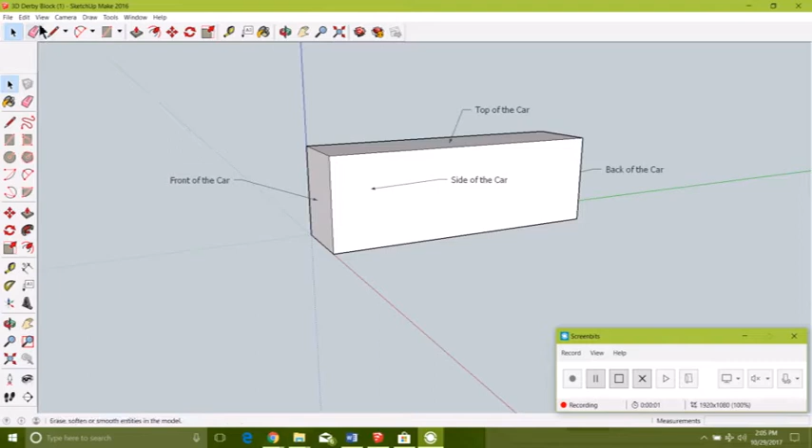The first thing you're going to do when you open the file is use the orbit tool and get to know this block very well. Notice the front, the side, the top, and the back of the car. Make sure you know where all these parts are so you don't mess up later.

Now use the orbit tool and turn all the way around, and notice that the other side is completely hollow. That's because you're only building the right side and right half of your vehicle for now.

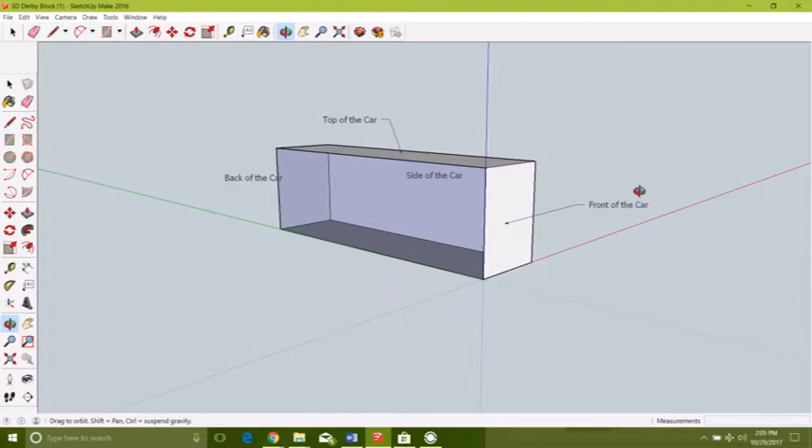Go ahead and orbit back so we can just see the side of the car. And we're going to go ahead and go to File and Import.

You're going to find the picture of the car you plan to draw. Make sure it's an image, and make sure that you're also using what's called all supported image types, and press Import.

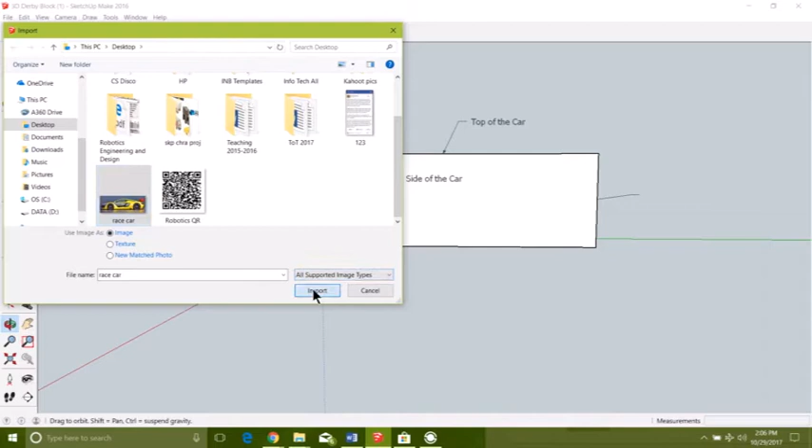Click in the top left corner of the box. Drag it down and down until the car fits the whole box, and your wheels should be a little bit below the box. That's okay.

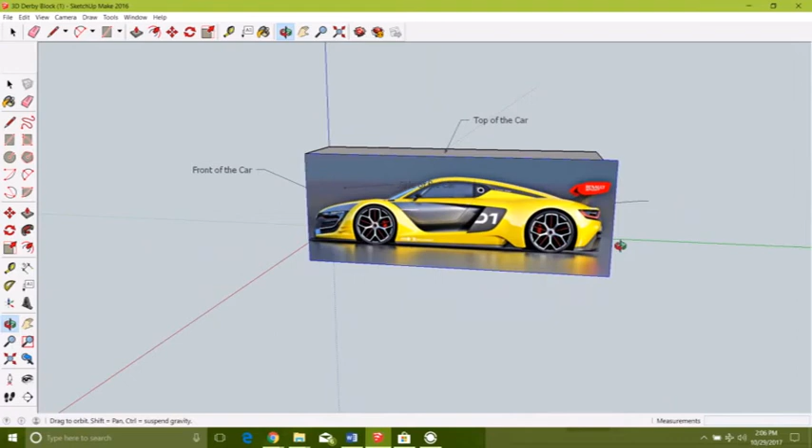I can see on this side that the back end of my car is sticking out a little bit, so I'm going to go ahead and use the scale tool real quick and shrink just that side a little bit so that I know the whole car is in the box and not off the box. And that looks much better.

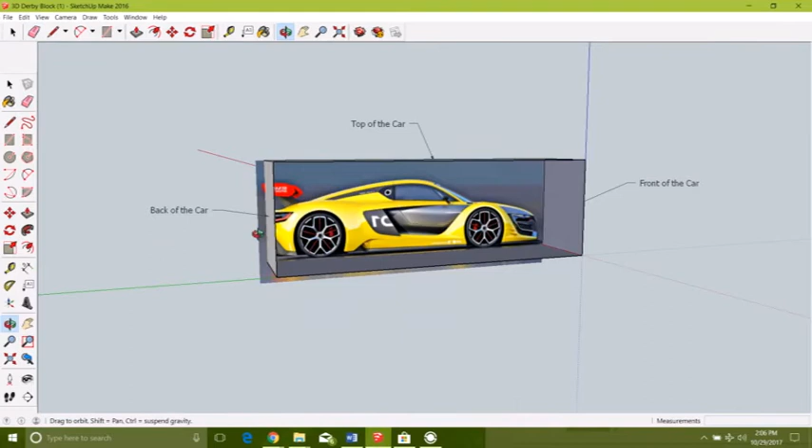Now I'm going to go to the back side again and erase that plane, the side of the car, so now I can see my picture on both sides. This is going to make drawing a lot easier for you.

We're going to zoom in and start by drawing our line across the bottom for the bottom of the car.

So I'm going to use my line tool and draw straight through the wheel. We're not doing wheels, we're not doing wheel wells, we're not doing any features. We are only drawing the outline of the car, the outside-most edges.

I recommend that you use H for the hand tool to be able to switch between hand and line, to scoot and slide your project across as you continue drawing. It does make it easier.

Again, on this side, I'm drawing straight across the wheel. I am not drawing wheels, I am not drawing tires, I am not drawing wheel wells right now. That will come later.

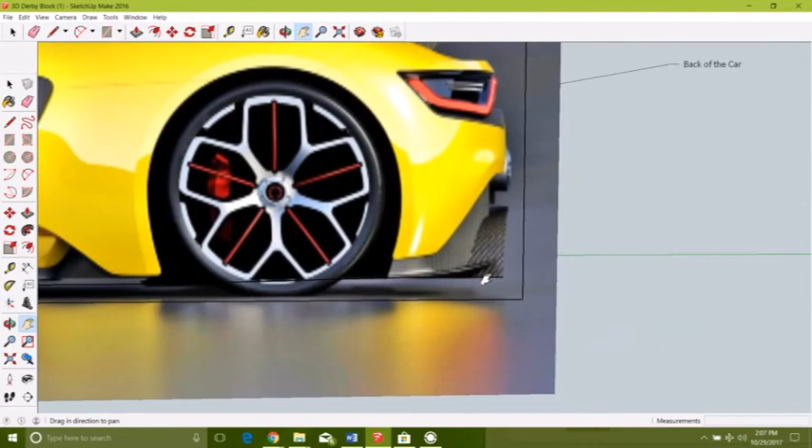It's very important to also zoom in here and there to get the lines to act better. Pay attention that it is also saying 'on face in image' - that's going to make sure that your lines aren't going the wrong way on a different plane.

Try to avoid drawing extra features, whether that's headlights, brake lights, exhaust, anything like that. We're ignoring those for now - we're just doing an outline.

Using lots of little lines can help you get more of the detail and overall shape of the car.

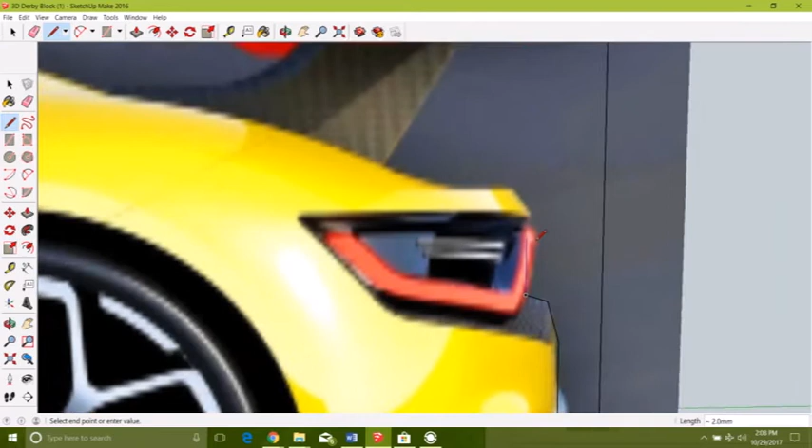Zooming in and out also helps you get the line to go where you want it, because sometimes it tries to snap into a different spot. So use your zooming a lot on this.

I'm also skipping the spoiler - I'm not going to draw the spoiler right now. That'll also come later. Right now I just want the outline of the body of the car, nothing else.

On this part here, the roof, you could use an arc tool, or you could just use the line tool and use lots of small lines, and it will sort of look like an arc when you zoom out and you're done. It's your choice.

As you head towards the bottom of your car, make sure that your points line up, and you will end up with a new shape that is gray, showing you that you did outline the entire car.

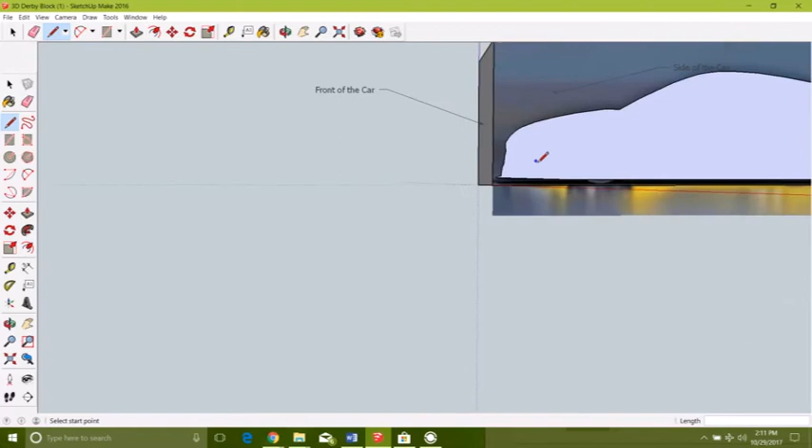If it didn't line up, zoom in on it closer and see if maybe you just missed a little spot. But you're going to need to do a lot of zooming to find the hole or gap.

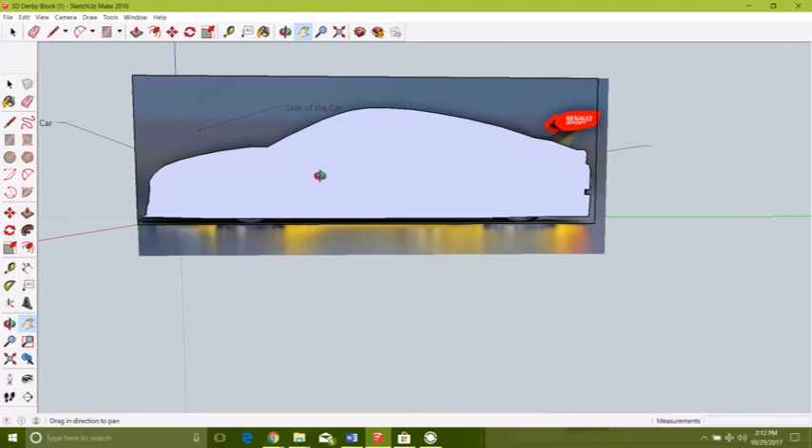Now we're going to go ahead and get rid of all this extra stuff we don't need. We're deleting the picture, we're deleting the remains of the cube, and the labels. We don't need any of that.

Do not leave any extra lines. All we should have is the outline of your car.

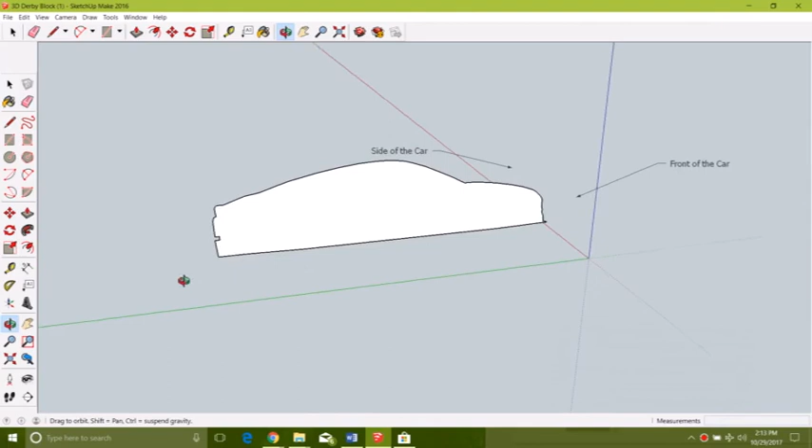Next, we're going to go ahead and push this car out 30 millimeters. If you notice at the bottom, there's a box that says distance while you're pushing out.

Our goal is 30. While you hold and you're dragging with the push-pull tool, as long as you continue holding the mouse button, you can type in 30 and it will automatically type into that box, and you press enter, and your car will be exactly 30 millimeters. Or you could just try to pull it until it says 30.0, but that's a little harder.

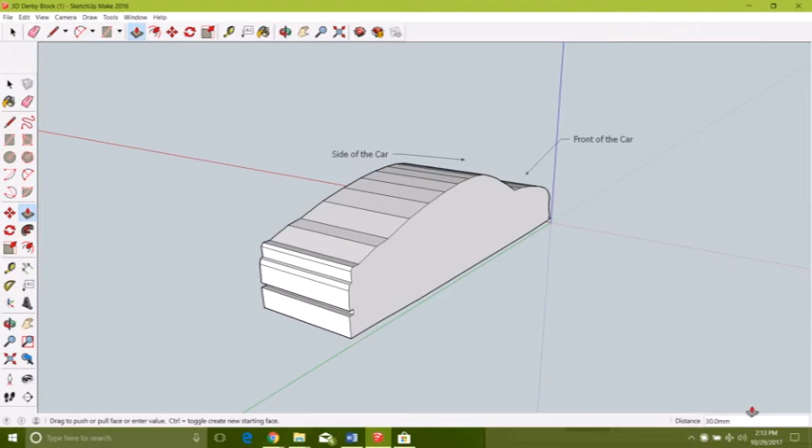Remember, we are only doing the right half of the car. So we're going to continue working on the front or the side face that was originally in the block.

And we're going to go ahead and decide with the line tool where we want our wheels to be. Try to get farther away from the edge, and you need to draw a line that is exactly 3 millimeters. While you're clicking and holding the line tool, you can type 3 and press enter.

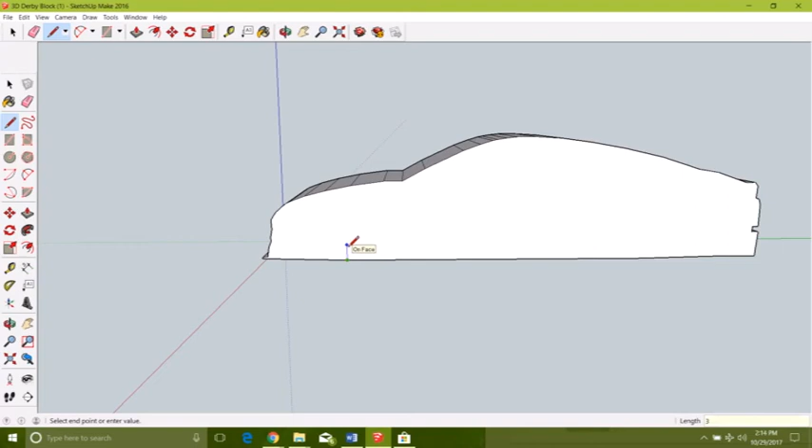You're going to draw another line for the back wheel, also 3 millimeters. Make sure those lines are blue on the blue axis - should be going straight up, on face and blue, so they should each be 3 millimeters.

Next, we're going to switch over to the circle tool, and we're going to make a circle that has to be at least 12 millimeters radius. If you can do more, that's probably better.

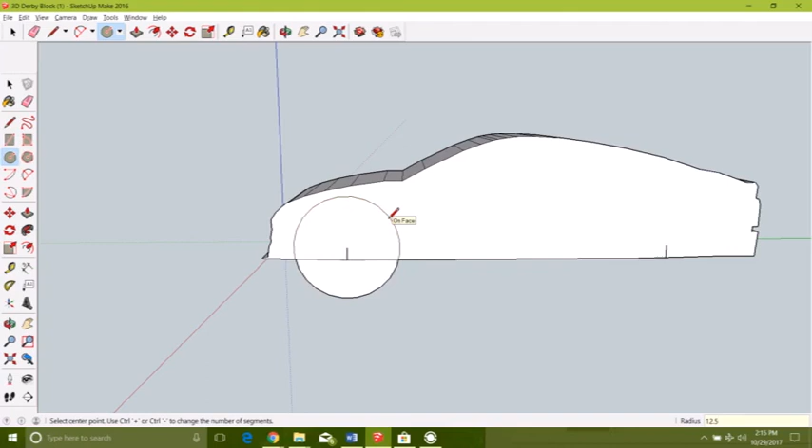By looking at this, I think the best I can get is 12.5 without cutting into my roof or the hood of my car. When you're doing this, try to be at 12, 12.5, 13, 13.5 - nice, round, even numbers like that. It'll make your life easier later.

Make both your wheels the same size. Again, this makes things easier.

Next, we're going to erase the bottom of the circle on both ends, and we're going to erase those little lines. Now orbit the car just a little bit to the left so that we're looking at it from a side view, and you're going to use that push-pull tool and push in these half circles 5 millimeters exactly.

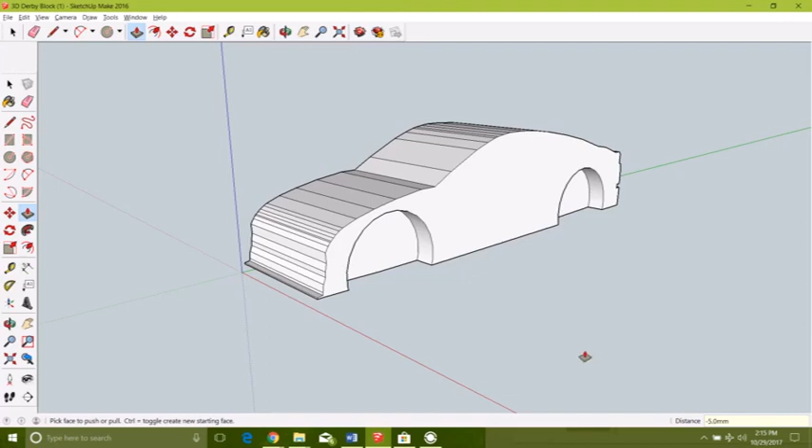And once you've done that, we are done with part 1 for tutorial 1 for the car.